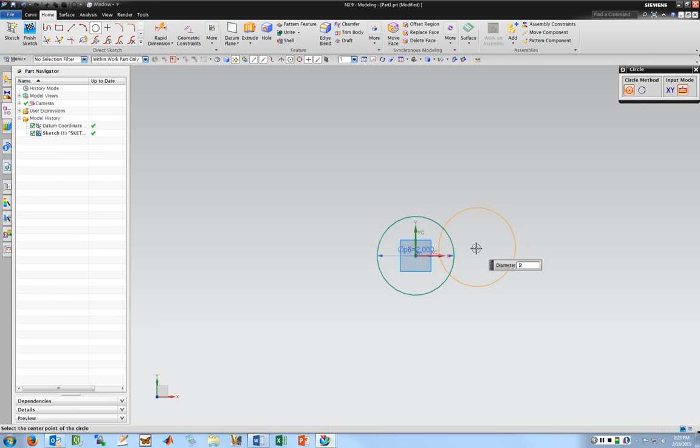Then I'm going to put a hole pattern in this thing. So there's a couple different ways to do it. You could do a line and then put a circle there and then revolve it, or you could put a circle out here and then put different points on it. I think probably the revolving feature is probably the quickest.

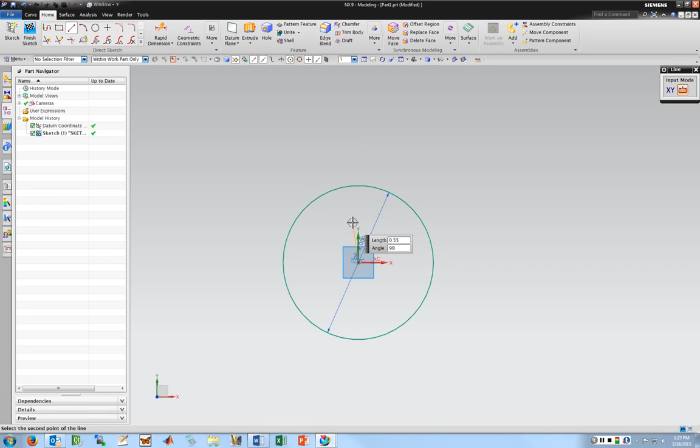So I'm going to put a line starting at the center. I'm going to come up here, probably an inch is too far, so let's do 0.75. 90 is fine. So I've got a line. That's going to locate the first hole in this bolt pattern.

So I'm going to draw a circle there. I'm going to pick the circle. I'm going to bring it out. Let's go 0.125, that looks too small for this part. 0.25.

Alright, I'm going to go ahead and delete the 1/8 inch hole. In case I'm hitting escape to clear out whatever it's done, so I can get back to that. Okay, so checking my constraints, note that it put a 0.75 there, which is from that, and then a 0, which is the left-right on it, which is what it's supposed to be.

So what I want to do, I want to revolve this around, or revolve the feature. One thing I'm going to go ahead and take care of is this line, so whenever I try to do the extrude later, it's going to try to auto-select this line.

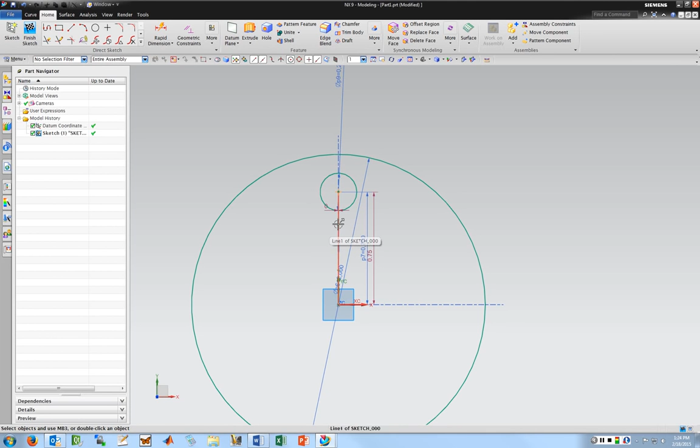So I can actually keep NX from trying to do anything like that with this line. All I need to do is highlight it, right-click, and then do convert to reference. And then that line, it's still there. I can still change the dimensions on it. It's just not going to try to extrude or revolve it or anything like that.

So what I want to do now is revolve this pattern. Let's just do 6 holes on this 0.75 inch radius pattern. So to do that, up here in the sketch tools, if you click down a little bit, you're going to see the different patterns. What I want to select is pattern curve.

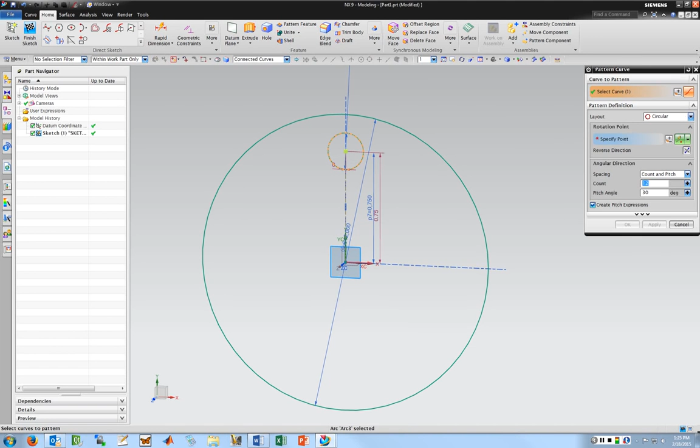So I'm going to pick the curve that I want to pattern, which is just a circle here. It's circular, so I need to specify the center point. That's what it's prompting for next. So I'm going to click inferred point and just click the origin, and now it's happy.

Note that it puts a bunch of them up there. It just started with 12 and 30. So I want 6, I want 360, so I need to divide 360 divided by 6, which is 60. And I've got my bolt pattern. Okay, so it's just a quick instance sketch pattern feature, which is pretty handy to know.

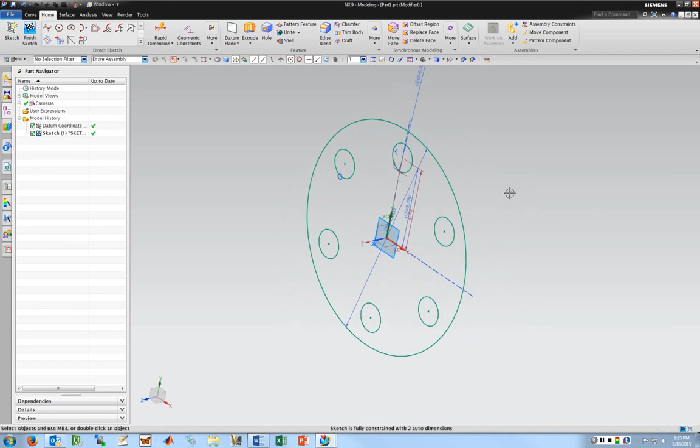So I've got the basic geometry of the part I want for this. So what I'm going to do is go ahead and finish the sketch, and I'm going to extrude this part to get a 3D part.

So I've set it to let me select curves. Depending on how you have your NX set up, it'll try to automatically figure out what to extrude. You can change this by right clicking to see all the different options. Connected curves doesn't do anything here because these curves are individual with no connection. But if you've got a complicated sketch with lots of fillets and chamfers built in, that automatically chains around it so you don't have to click everything. I could do some other options here.

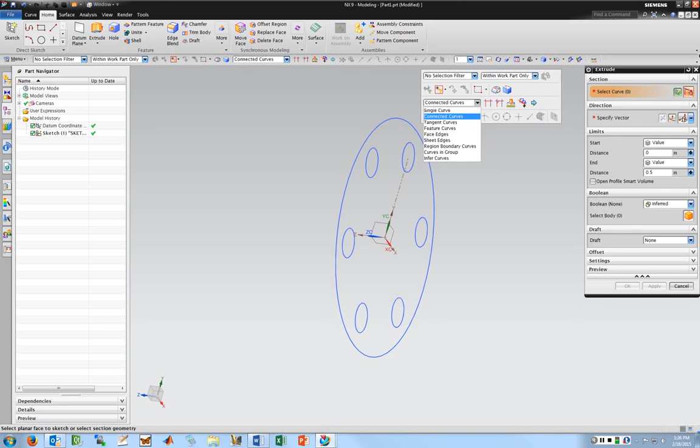Probably single and connected is the most useful, so I'm going to do single for this and go through picking all of them. You can see I picked that one and it already extruded it. I'm going to click all 6 of them, and I've got the basic geometry. I'm going to change the thickness to something that looks right. Let's do 0.25 - that looks good.

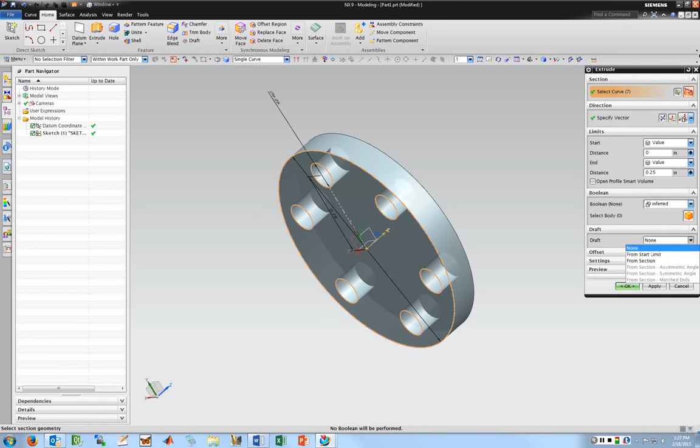So note for Boolean, it's set to inferred, which is going to create a new part. I can unite geometry, subtract, or intersect. Inferred, though, generally if you're just extruding a whole 3D part, gets it right. If you're subtracting, it gets it right too. If you need to do anything past that, you have to manually set this to what you're looking for. Draft lets me set a draft angle if I need to, for something that's cast. So I'm going to go ahead and OK, and I've got my first part.

I'm going to put a chamfer on this just as an example. Let me do chamfer, pick the edge. That looks good, that's a 32nd. And then I want to do an edge blend or a fillet here, same radius. So that's just a basic, simple extruded part.

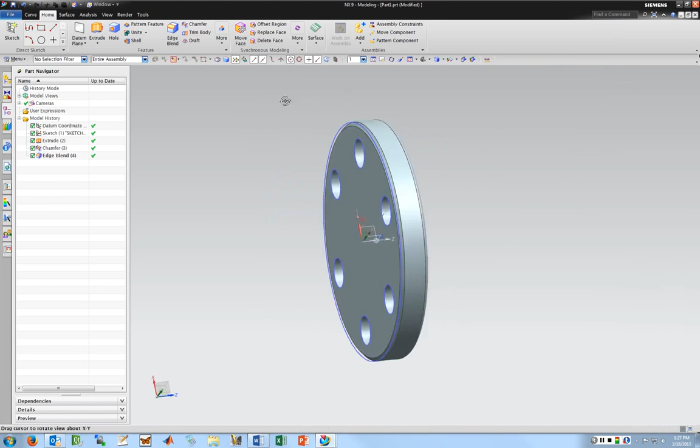I'm going to go ahead and save this, and then create a revolved type part. This is going to be a part that locates on this other one, so it's in the same folder. I'm just going to call this part 2, and model in inches, okay. So I need to go back to home, start a sketch, XY - everything looks good.

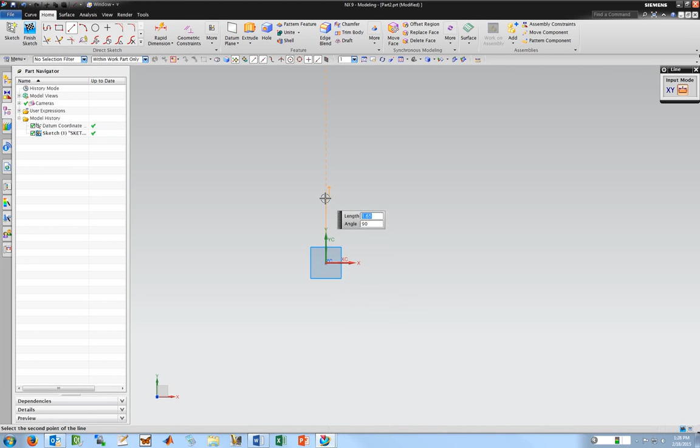I'm going to draw a peg with a flange that connects to this thing. It's going to have the same bolt circle, and it looks similar, but it's going to have an extension on it. So I'm going to use this as a revolved part, starting with a line at the origin. I'm going to come up - since that was 2 inches diameter, I want to do 1 inch.

And then I want to do another line, let's do 0.25 over. And then I want to come down - let's go 0.5, yeah. Scroll in a bit, and then let's just go 2 inches.

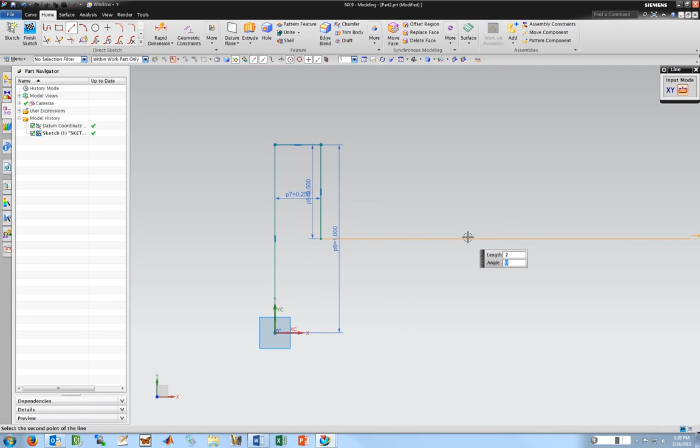Okay, I need to get this thing back to home. So note, if I start getting close to that, it picks up that constraint over there and snaps it down to that line, which is what I want. And I want to bring it back. All right, I've got my loop of curves here. I'm going to go ahead and revolve this now. That's pretty much what I need, so I'm going to finish it.

I'm going to revolve it. Again, this is actually set to infer curves, so if I click this, it's going to do all of them. I'm going to cancel that, go back to revolve, and set that back to what I have for extrude, which is single curve.

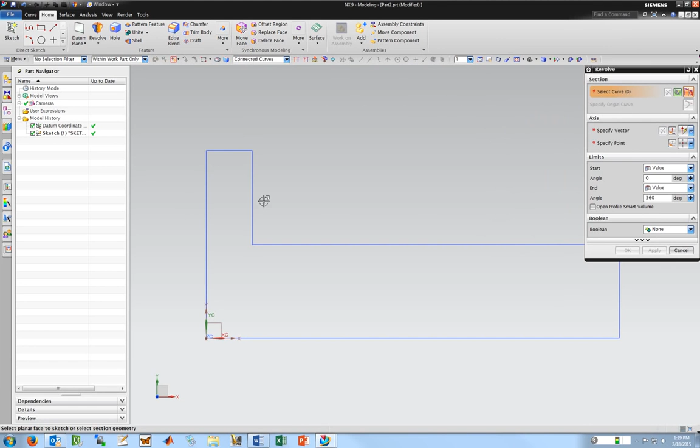I could do connected curves for this since there's a chain of them, and that works. Or I could go back to revolve and do my single curve, picking every one of them. Actually, I don't know what it's doing right now - let me cancel that out. That was weird, let me try that again. So, single curve.

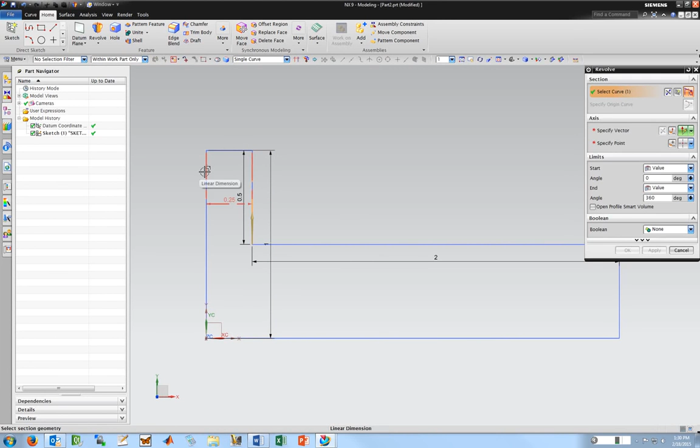Well, that's not working, so I'm going to try something different. Revolve - I'll just set it to connected curves. That's easier, and now it's got the whole thing.

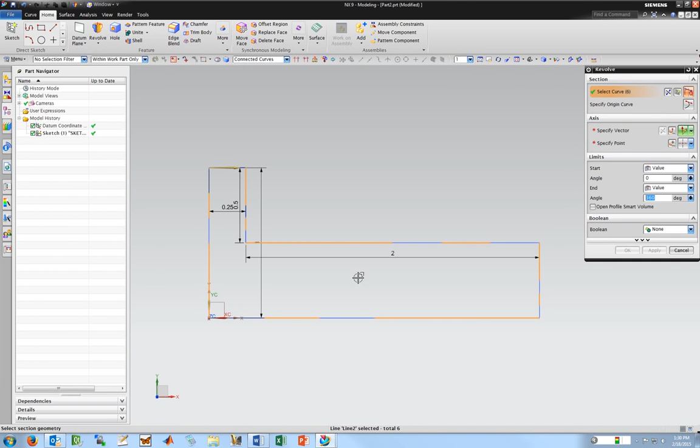Okay, so I need to set a vector that it's going to revolve about. This is going to be the x-axis for this. If I did it about y, it looked completely not what I want to do, and if I try to revolve about z, weird things are going to happen. So I want to revolve about the x-axis, and I need to pick that vector. I'm just going to click inferred vector.

That gives me the little 3 axes here I can pick from. I want to do that one. And then I need a revolve point - if I revolve around here, it looks different than if I revolve around here. What I want to do is revolve around here, so I'll do inferred point.

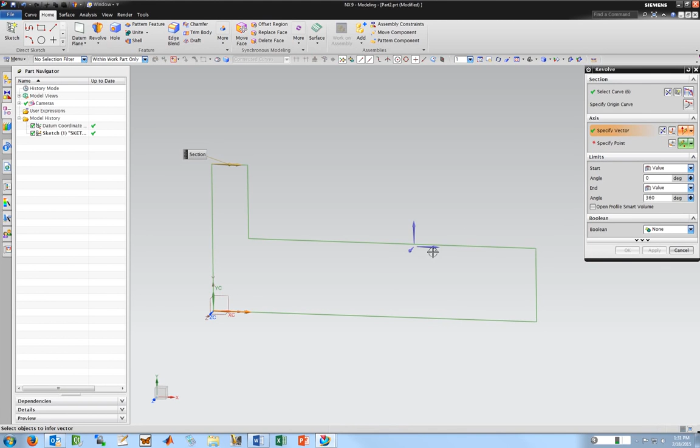So let me pick the origin. I'll right click and see what's going on. So point, let's see, oh there we go. I wanted to do an inferred point, and then it should let me pick. What is it doing? And point, there we go. I saw it for a second. Let me scroll in a bit. The origin, there we go. I don't know why that was so hard.

And now Boolean none, okay. So that's a simple revolve part. I need to go ahead and put that pattern in.

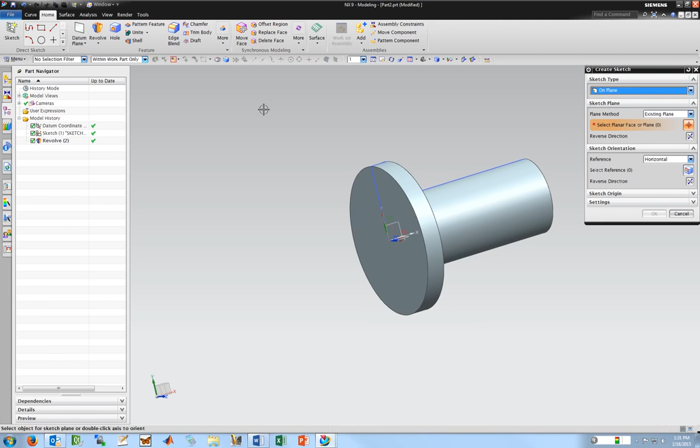So to do that, I'm going to create another sketch. I'm going to create it back here on this surface, and I need that same bolt pattern. So I'm going to show a little bit different way of doing that. I'm going to draw a circle. So let me get that line first, actually.

I can't remember what I did. Was it 0.75? I think so, yeah. So that's that line. I want to convert that to a reference real quick. I have to escape out first.

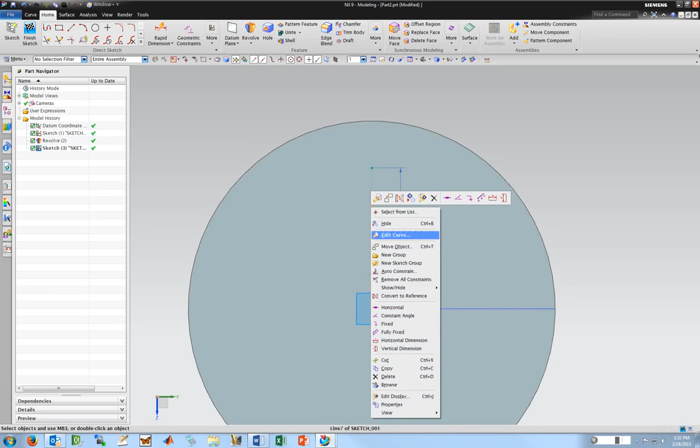I'm going to put that circle in. Okay, and instead of revolving the curve, I'm going to actually revolve the feature. So I'm going to finish this sketch.

I'm going to then go ahead and extrude through. So I'm going to pick that curve. Note that it's trying to extrude it out as a peg, but I want to subtract it. So if I set the distance, right now it's going 0.25 this way. If I zero it out and set it to 0.25 the other way, it will figure out that I want to...

It should figure out I'm going to subtract it. Well, it didn't, so I want to click reverse direction, and that takes care of it for me. So the inferred shows subtract now, so by moving it the other way, it's not going to extrude this inside of the part, it's basically going to cut that part away from the part. So that's what I want. I could just tell it to do that with subtract, but the inferred got it right. So I'm going to go ahead and click OK, and I've got the hole.

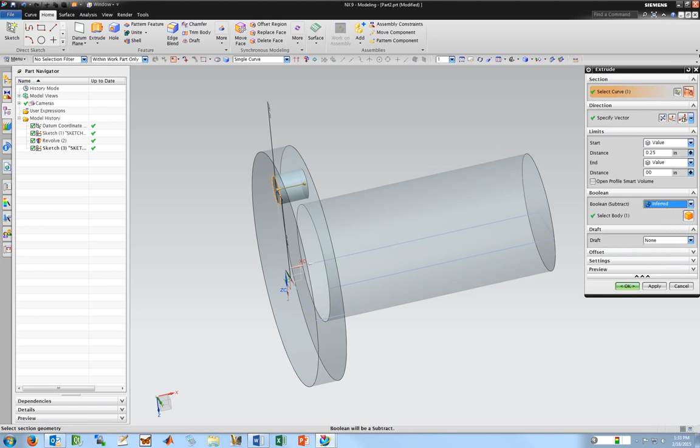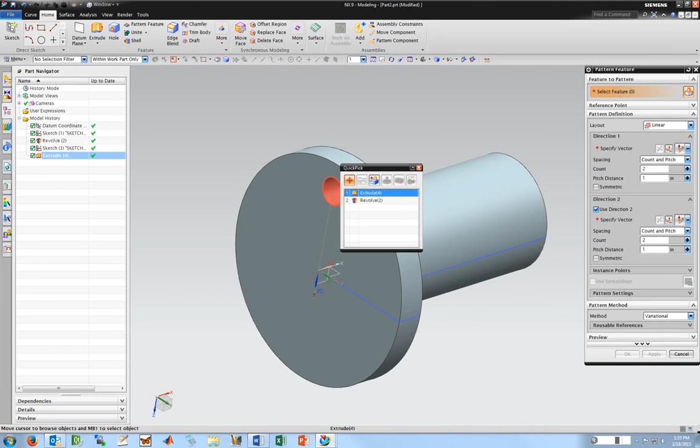So what I want to do now is actually array this feature. The tool is called pattern feature in NX9, if you don't know where that's at. So pattern feature, select feature to pattern. I select the feature of that extruded hole. And so I need to pick, so all sorts of crazy options here, which is kind of interesting, you can do some crazy stuff if you need to. Circular, that's what I want.

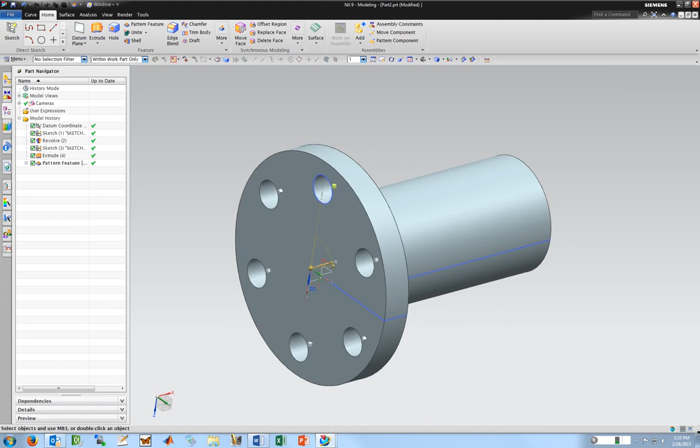I need to pick the vector again, so that one. I need to do the origin point, so that one. I don't know why it was easier to pick that time. 6, 60, that's what I want. Okay, so same thing, different process.

Alright, so that's pretty much the other part I wanted to create, so I'm going to go ahead and save that. And now I'm going to get into the assembly stuff. So what I'm going to do is File, New, Assembly instead of Model, and just leave it Assembly 1. That's fine, keep it in inches.

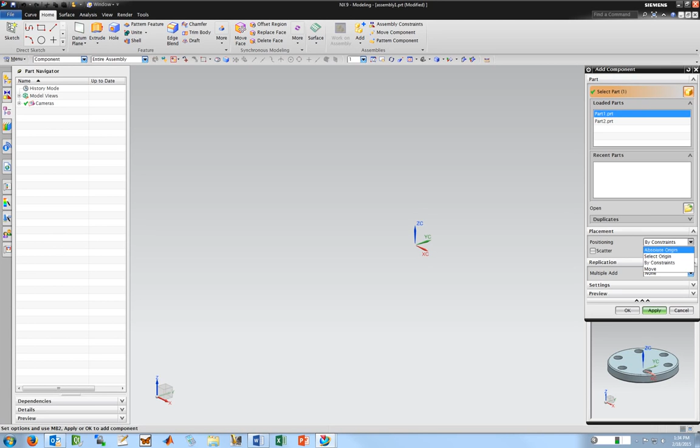Okay, so since I have these parts open still, I can load these. If I'm trying to add a part that doesn't exist in the assembly, I can just click Open here. So what I'm going to do is start with the first part. I'm going to position, so there's lots of options here. If you just want to put something down and then move it in a convenient spot, you put it with move. If you want to just set something down based on the origin of the part, you can use that. You can select origin, or you can do constraints. So the second part I'll set with constraints. This one I'm just going to put with origin, that's fine, and then apply, and then there it is.

So I'm going to go do the second part. This one I want to position with constraints, and then I'm going to go ahead and hit OK.

And so now it opens up the assembly constraints dialog. This will allow me to basically put the constraints in the component before I add it, which is pretty nice feature of NX actually. So there's lots of different ways you could constrain this. What I'm going to do, since I've got circular parts, I'm going to use a concentric constraint first.

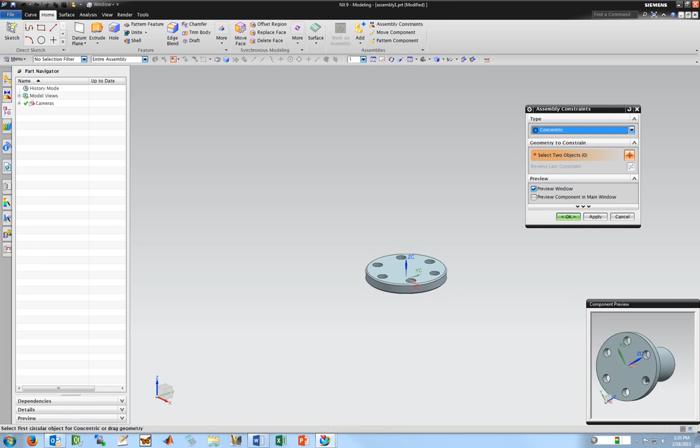So for concentric, I need to come down to the component window, and the rotating and moving around sketching type functions work the same in this little window as they do in the main window. I want to get to that, and I want to pick that. So I've got those two things selected. Note nothing happened, you can't see anything. You see the constraint there, but nothing's moved around. You need to hit OK, and then bam, it's there.

Note that it's not lined up. Nothing about that concentric is going to line these circles up.

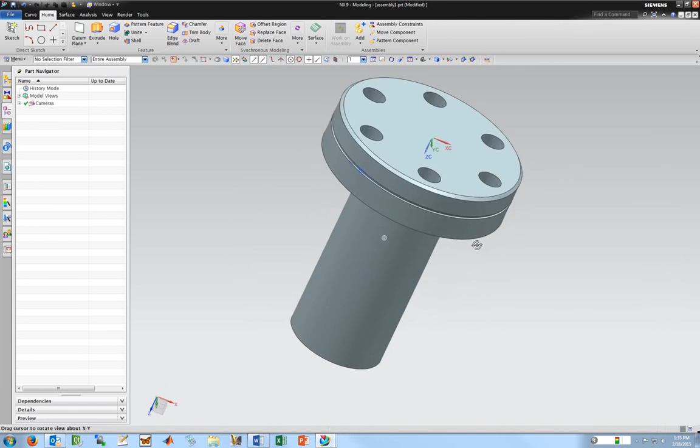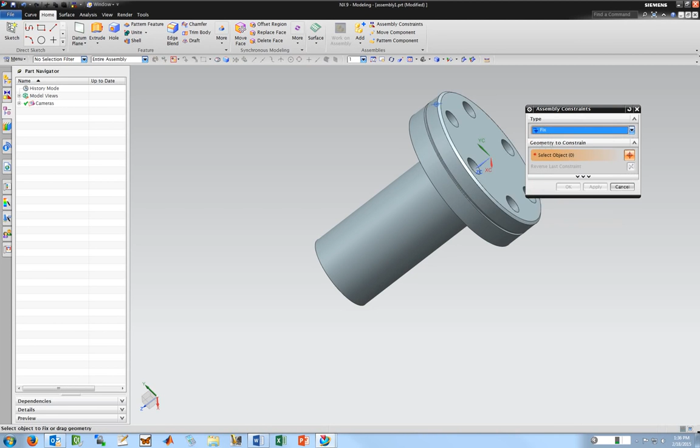So what I can do is, since I have that one constraint in there, I do want to be able to move this relative to this one based on that constraint. But the first thing I need to do, if I start trying to rotate this part, it's probably going to rotate this one too, so I actually need to fix this part. So to add a constraint to the assembly, I'm just going to do assembly constraints, and then go fix, and click that part, and then it's fixed. That means it's basically welded to the ground. It's not going to move, it's not going to rotate.

So now I can move this component, and it's going to keep this concentric constraint always. It's always going to try to maintain that, but it's going to let me move the part within the degrees of freedom that offers, which is very nice. There's some programs that don't do this. They don't keep the constraints constantly in check whenever you're moving stuff. Inventor, I know, is really bad at that. I don't know about SolidWorks, it's probably better than Inventor at that, but Inventor is pretty terrible at it. NX is actually great at it.

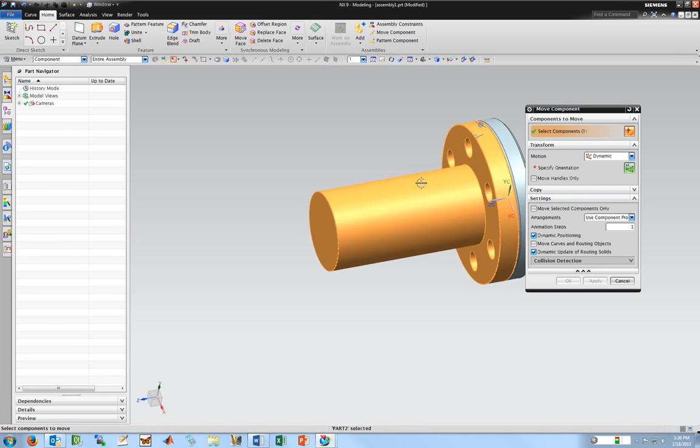So I'm going to do move components. I want to move this to get it lined up. I'm going to click this little XYZ here in the move components dialog. This gives me all the move handles. So this lets me move it on its degrees of freedom. I can't move it in Y because that concentric constraint prevents it. I can't move it in Z because it prevents it. I should be able to move it in X. I don't know why it's not letting me.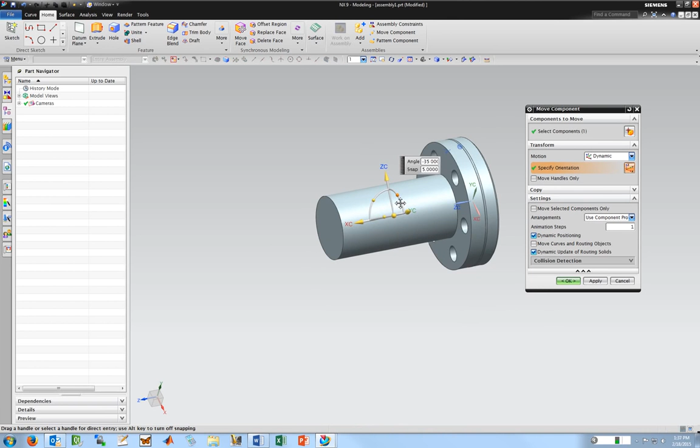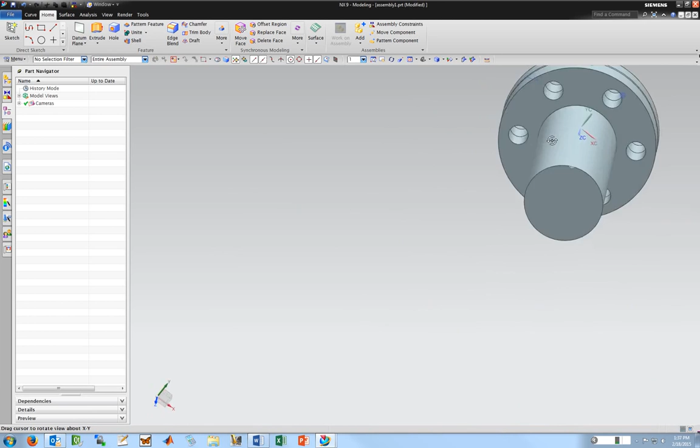Well, it will let me rotate it though. So rotating it, I want to try to get it closer. So note that I've got it closer. So now all I need to do, I'm going to go ahead and OK on that, and then I should be able to just pop a concentric in there, and then those things will always be lined up. So now there really shouldn't be any degrees of freedom between these parts. They're pretty well locked together at this point in time.

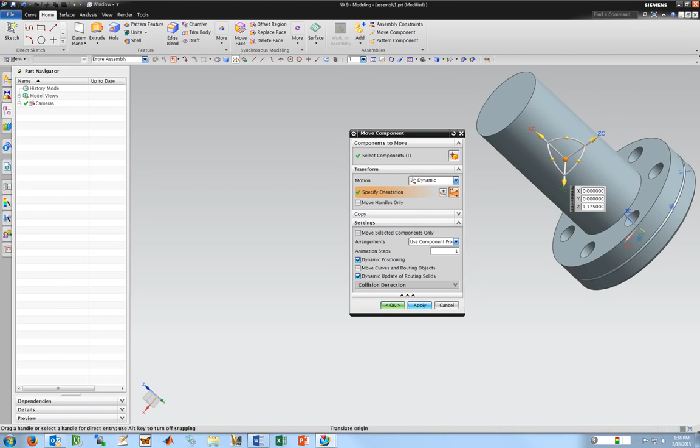So that's basic constraints. And again, if I go to move this thing, it's probably not going to let me do anything with it. So grab that, put the handles up, and yeah it's just... oh sorry, wrong one, let me try that again. Move components, that one's fixed, obviously I can't move it. So here, yeah, it's not letting me do anything, just like it's supposed to. So yeah, that's fixed in there now, and those components are connected.

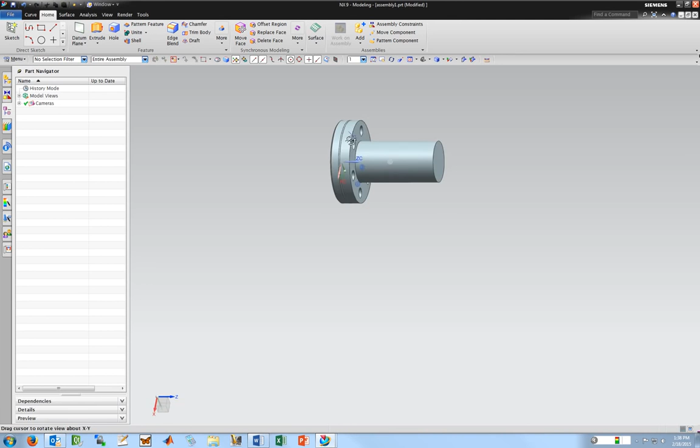Next time is going to be motion simulation, and we basically have to have things assembled like this in order to start a motion simulation. Everything has to be kind of placed where it's supposed to go, and if you set the constraints up right, most of them will actually map over to the motion simulation. So I can kind of move some of these, if I had a degree of freedom I can move these, but it's not physically based. The motion simulation is actually physically based. So that's what we'll do next time.

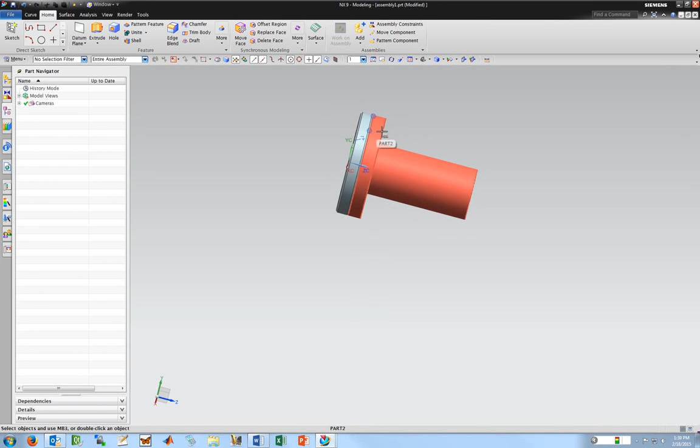The assignment's posted on Blackboard. It basically covers doing an extruded, a revolve part, a chamfer, an edge blend, a fixed constraint, and a concentric constraint, which are all done in this video tutorial. That's it for now, thanks.